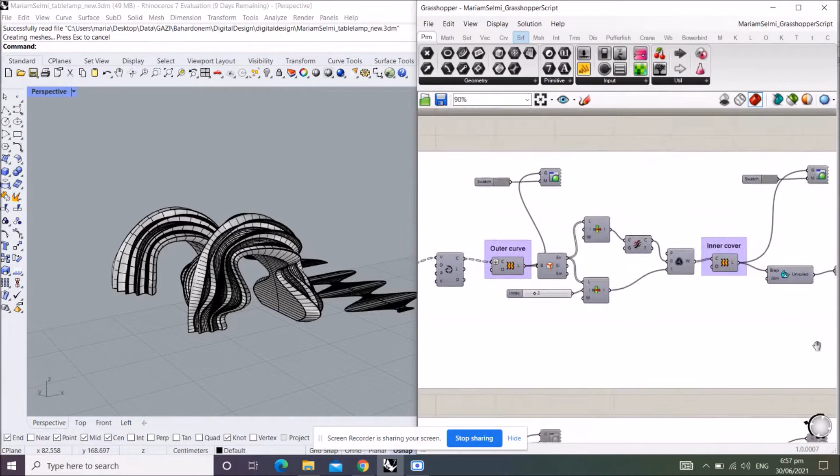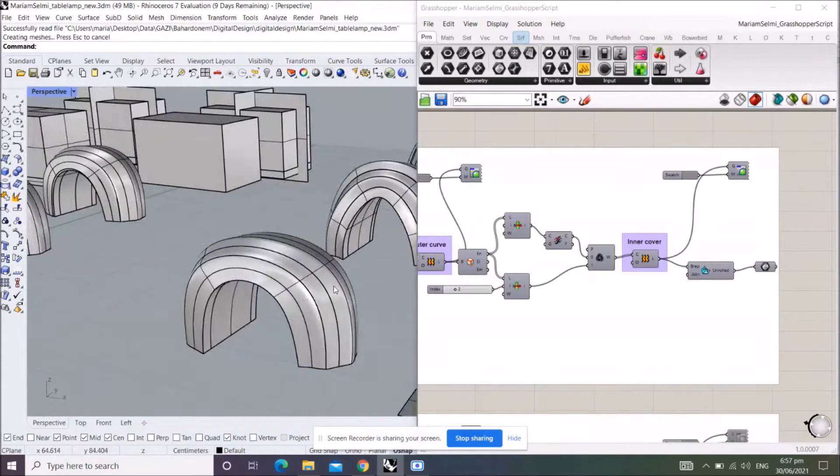And actually, initially, I wanted it to have so many curves and be of a complex structure, but later on, I was told this is hard to be fabricated, especially that we're going for a mold, not directly 3D printing. So I simplified the object much more, and then I moved to figuring out how to create the mold. I had two ideas in mind.

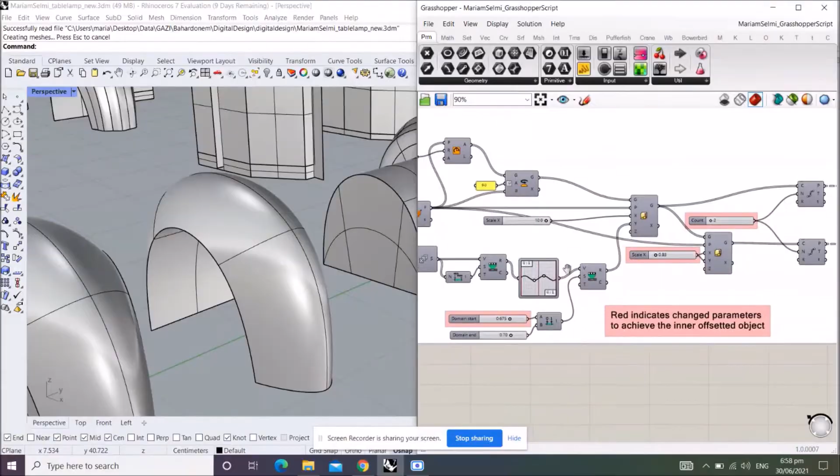The first one was actually to use some sort of fabric. So I played with some parameters of the original design to create some sort of an inner layer that could actually produce the same shape when fabric is folded around it. So I first tried with the cream that contains beeswax to actually make sure that the mixture could be taken off without damaging the mold itself.

And after that, I moved to the first trial, which I had the idea of having the mixture inside a thin fabric and then placing it over the mold, but that wasn't really working out. Then I moved to the second idea, which is actually covering the fabric itself with the mixture and then placing it over the mold to take its shape. So the first time it was a bit of a fail. It just looked odd and wasn't sandable, or it couldn't have a smooth surface.

So the second time I actually went for more work in preparing the fabric more and stitching it and preparing it in a way that it perfectly fits over the mold. But even with doing so, after placing it over the mold with the mixture, I guess being a bit heavy on the fabric, it stretched out a bit and it gave some weird shapes in some areas.

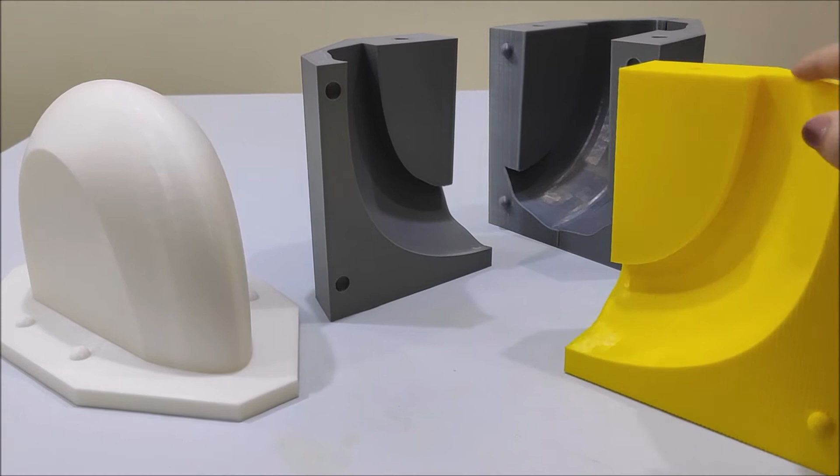So I moved on to the second experimentation, which is a regular 5-part mold that has 4 parts as the base and then one cover to actually make the object have some sort of a thin outer layer, and then there's a thin layer inside which is going to work as the glass that's gonna be semi-transparent, and in between them I can place the lighting.

I noticed that the cover could have been just a void from this part, like the inside, so it uses less material. Perhaps it could cost less and not be that bulky, but anyways, it's already printed out. So I started with taping the outer layer to make sure that the parts stick together and there is no leakage. And I started preparing the mixture. I actually used for all the experiments cement, gypsum, and water with a 1:1 ratio.

So I poured the mixture in and I waited for it to dry. And when I was trying to take it off the mold, it broke down in the middle. Like each part of the mold would be broken, but that area of the mold, like the mixture that is stuck to one part, would easily get out and be intact. It wouldn't be broken into small pieces or anything.

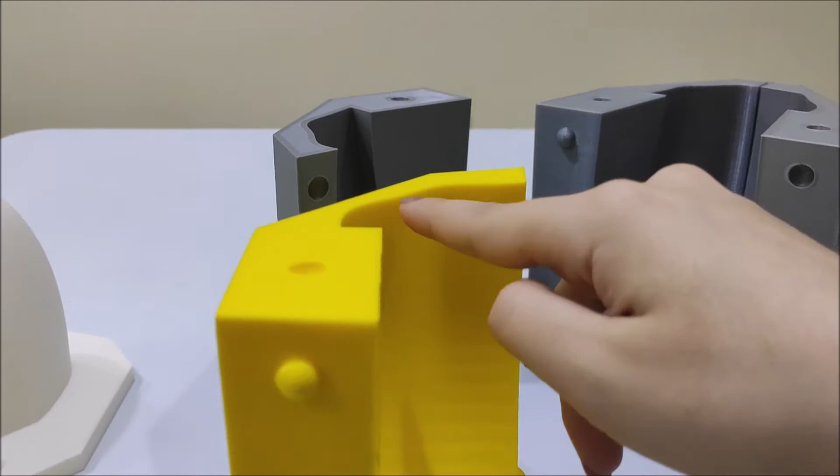And I figured, as there is no cover in here, I can see that the problem is indeed with the mold, the middle part of the mold, because it's hard to get it out without breaking the different parts from each other. So I guess if the mold itself was printed from an elastic 3D printing material instead of this rigid one, it would work perfectly. But anyways, I had to go with what I have.

So as the different parts are actually intact, I figured maybe I can prepare a thicker mixture using less water and actually try to stick the different parts together. So I did that. I patched it up, and then I think it worked to make it some sort of a single object. And then I went to sanding it after drying.

The sanding process was very tedious. It took around 3 hours to finish, to just try to smooth it as much as possible, to remove any extra mixture that's stuck on the outer layer, and to remove the thin lines of the 3D printing mold. So after that, I actually applied the protective coat, and then I added the light strip, and after that I added the inner cover. So this is the final object I have in hand.

I'm pretty satisfied with the result. I could have done a bit more sanding maybe, but I was afraid I could break it or something. And my only comment is actually if the mold itself with the same design was printed out of an elastic material, it would have worked perfectly.